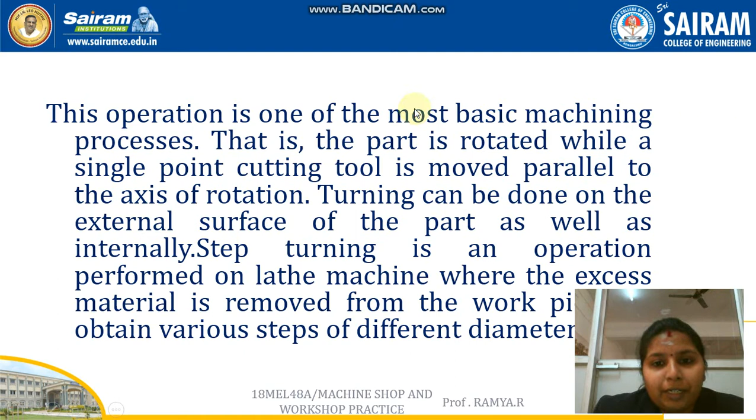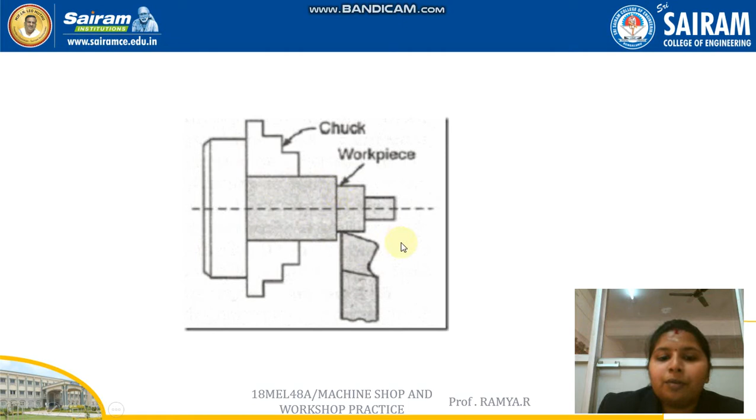Step turning is an operation performed on the lathe machine where excess material is removed from the workpiece to obtain various steps of different diameters. This is the definition of step turning. This is a pictorial representation of the step turning process, where steps are made in the workpiece with the help of the tool.

Next is about how to do the experiment. The aim is to prepare the workpiece as per the given dimensions, and the tools required are a single point cutting tool, chuck key, tool post key, outside caliper, steel scale, vernier caliper and micrometer.

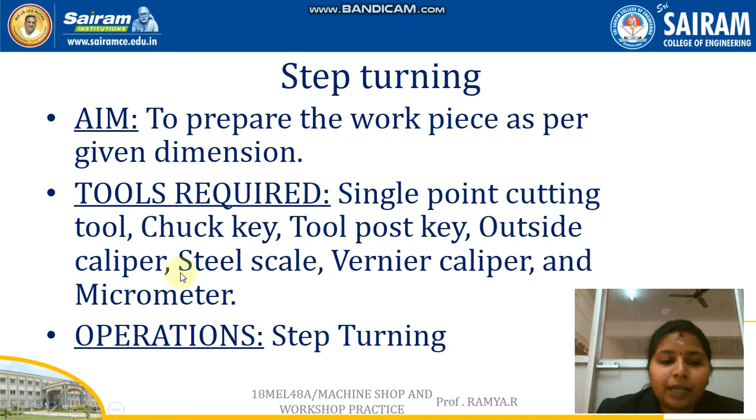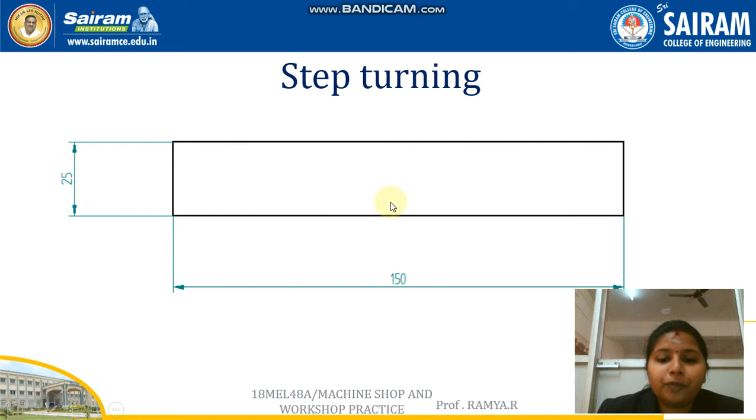The operation we are going to do is step turning. This is a plain workpiece with 25 diameter and 150 length. This is the final product we are going to get by doing the step turning, with different steps of different diameters.

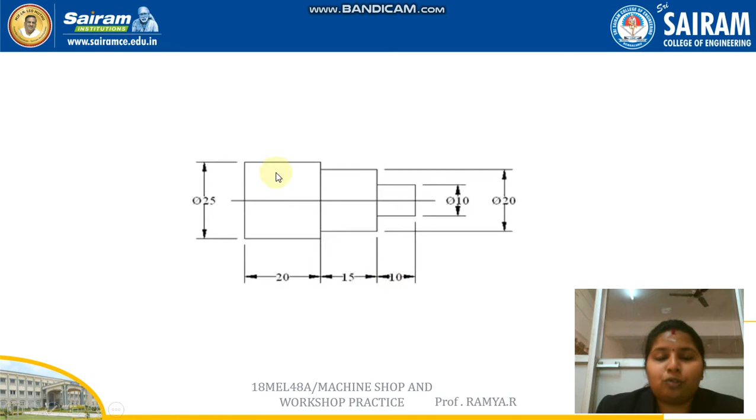The minimum diameter will be 10, the next is 20, and the last one is 25, with lengths varying as 20 mm, 15 mm and 10 mm. So this is the final thing we are going to get.

Looking into the procedure, initially the workpiece, after plain turning and facing, has to be placed in the chuck. With the help of the chuck key, we open the jaws, place the workpiece, close it again, and take out the chuck key. Once this is completed, the single point cutting tool is placed in the tool post, brought near the workpiece, and when the machine is started, the workpiece starts rotating.

Initially we need to do a plain turning, and after that the diameter has to be reduced, with material removed according to the required diameter. After completing the step turning process, it has to be verified with the vernier caliper whether the exact diameter is achieved for the given length. Markings are made on the surface so that we can do the machining up to that point.

Looking into the procedure, the workpiece is fixed in a 3-jaw chuck with sufficient overhang. Adjust the machine to run the job at the required cutting speed. Fix the cutting tool in the tool post and perform centering so that the axis of the job coincides with the lathe axis. Give the feed and depth according to the cutting tool. Facing operation is performed, then plain turning. After that, by checking the dimensions using a vernier caliper, the step turning is done. So this is how a step turning operation is done.

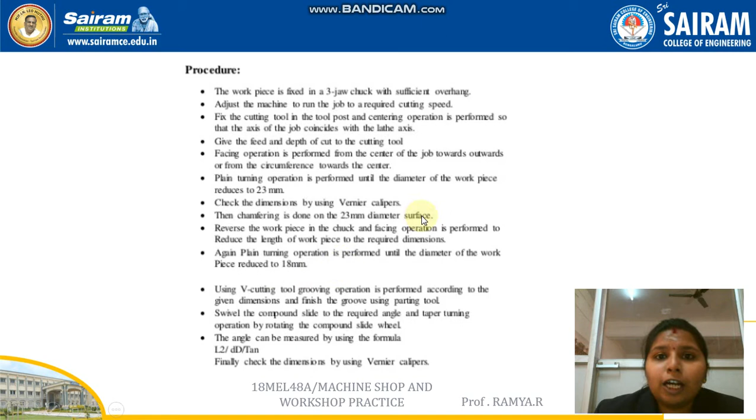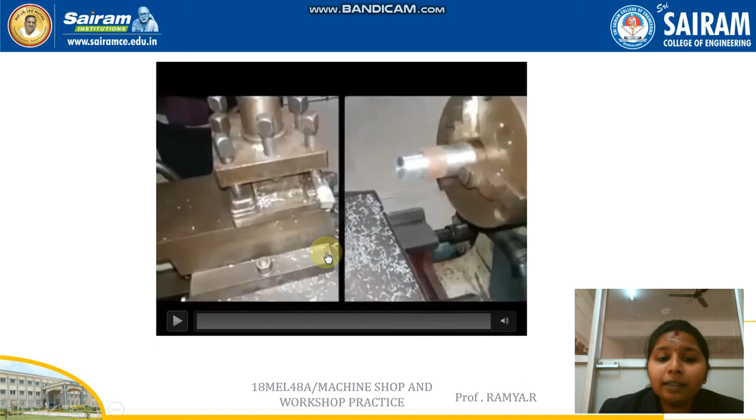Now I'll show you the finished product. Once the step turning is done, we get a finished product like this, and this video shows you how to do the step turning operation.

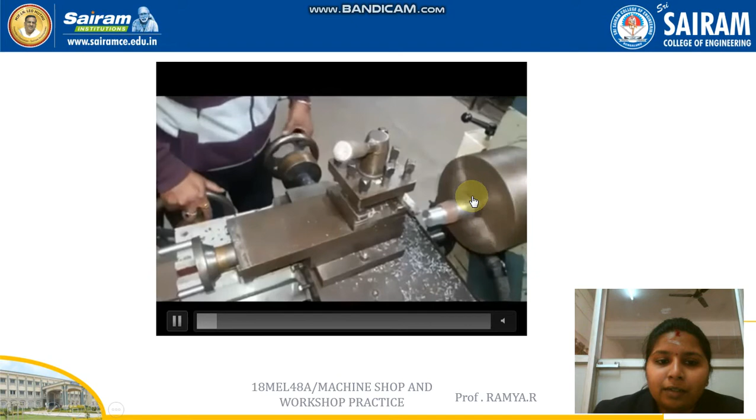Initially the tool is brought near the workpiece, which is placed in the 3-jaw chuck, and the tool is brought near it. The machine starts rotating, and once the tool moves near the workpiece, we start giving the feed with the help of this handle.

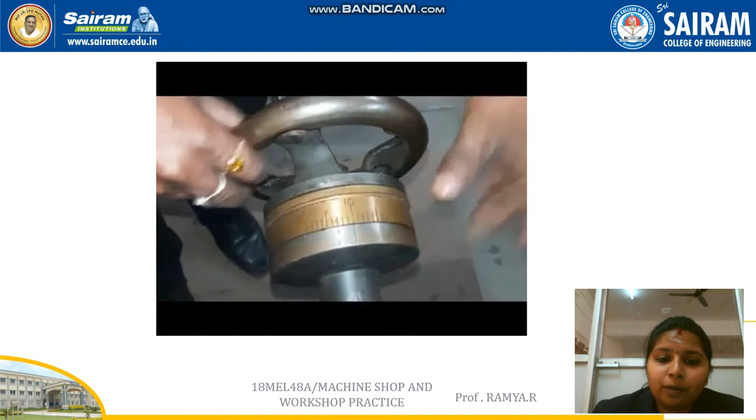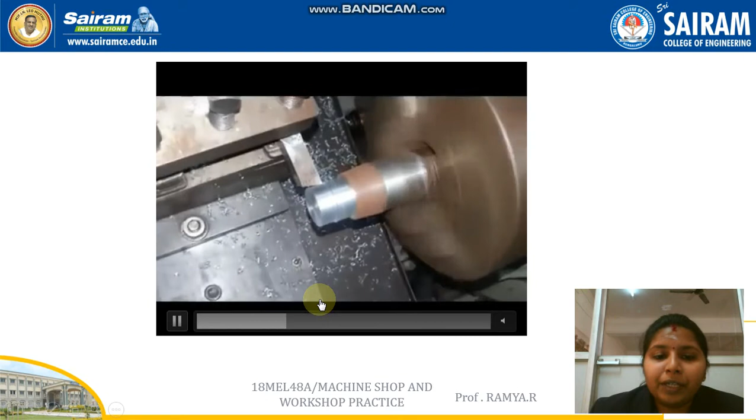The feed has to be given so that it creates a step, and after each step is created, we need to check the length and diameter to see whether the expected values are achieved. The excess material comes out in the form of chips, usually helical shaped continuous chips. The feed has to be given very slowly, or else it may lead to breakage of the tool.

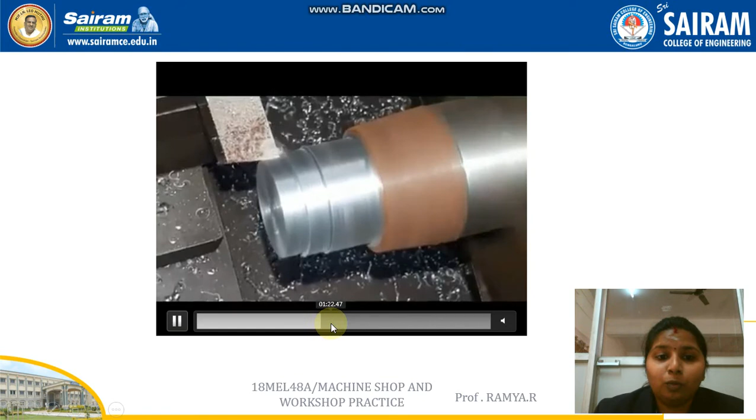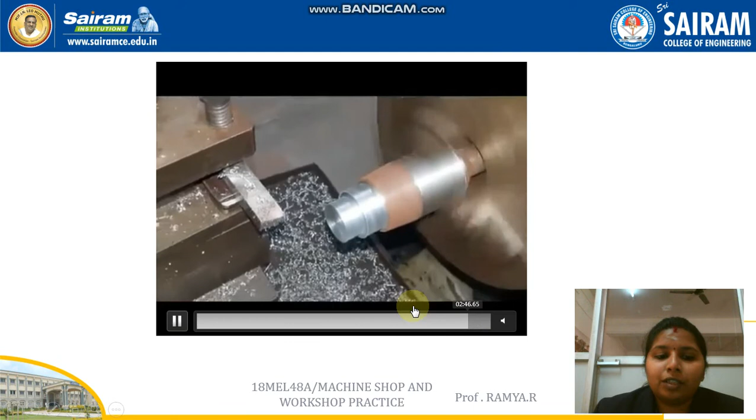So the steps are done. Likewise, the procedure is repeated and the step turning process is completed. Once finished, we get a step like this. So this is how a step turning operation is done. Thank you.